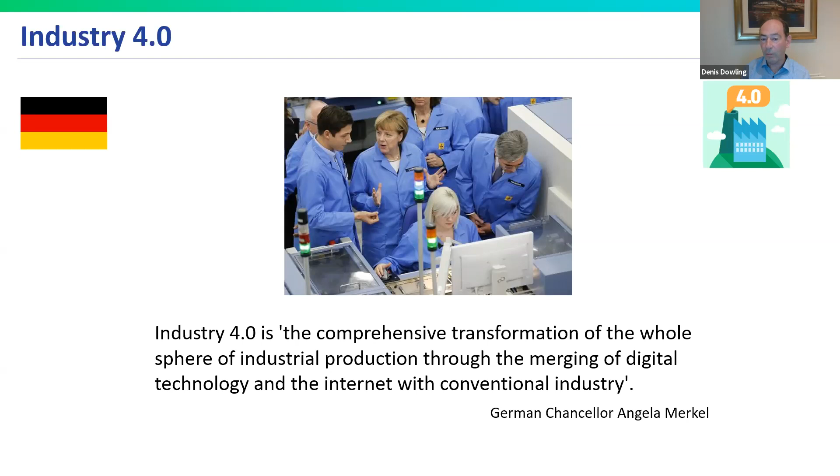So briefly in terms of background, we talk about Industry 4 as the fourth industrial revolution. The first revolution, dating from the late 1700s, was steam. The second was the use of conveyor belts, the first in Cincinnati, with Henry Ford's automobile plant being another example of that second revolution. The third dates from the late 1960s and the use of IT and electronics and the efficiencies from that.

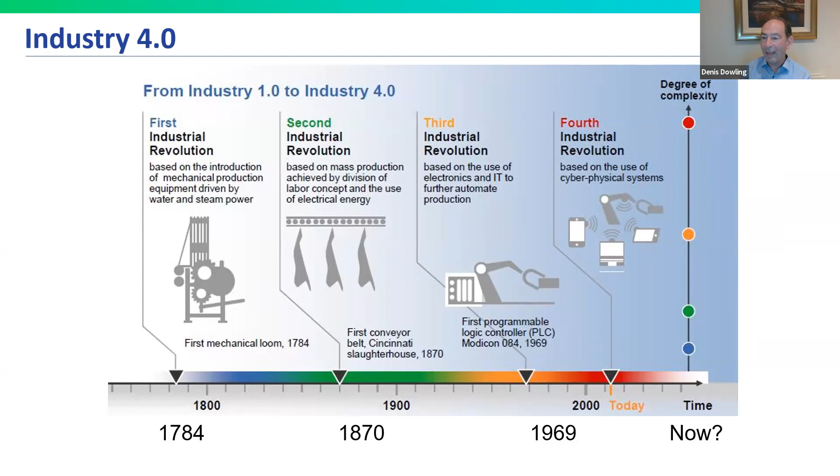And we refer to the fourth revolution as the cyber physical system - this idea of the cyber world, the digital world, combined with the physical world. What I hope to do in this presentation is give some examples of that impact, and you can see on the right hand side the degree of complexity associated with that fourth revolution. So when we refer to it, it's actually the convergence of a number of different technologies.

We look at automation, and I'll talk later about how automation is taking a lot of manual jobs out of manufacturing. You have to look at security aspects, because if information is available in the cloud, how do you keep that secure. We also talk about simulation, which can be a range of things - materials simulation, process simulation, simulation based on the data. And finally, an area where we're very actively involved is additive manufacturing, or 3D printing - the ability to fabricate on-demand components and fabricate complex shapes with ease.

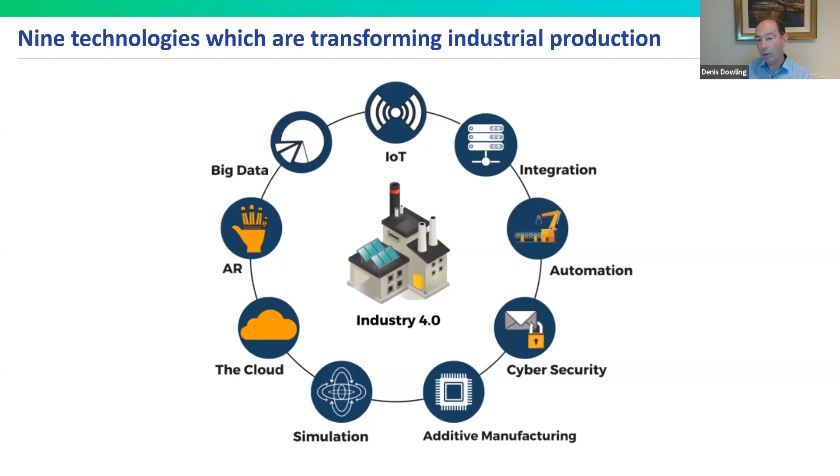All these technologies converge under what's called Industry 4. Industry 4 may not use all of them, it can use some of them, but it's that convergence and the impact they've had that is so important.

It has about 320 kilometers of cables just in those lifts alone. In a typical manufacturing operation, we'd look at the lift, its use, and ongoing maintenance. But through the use of sensors - monitoring the power used, the door opening, the loads in the lift, the sound, temperature - all these are now monitored. So ThyssenKrupp offer a service: not only do they make the lift, but they guarantee the lifts will be up and running with much greater efficiency than conventional lifts, because they offer this service to those who buy it.

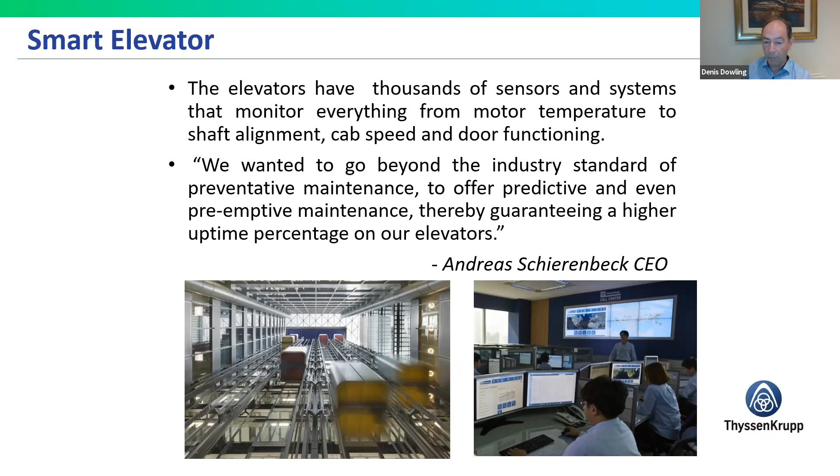So this idea of servitization - you not only make the product, but you supply an innovative service around that product. This is extremely valuable, because one lift going down in this building is of enormous cost in terms of people's time.

Another company using this is Nike, and the information can be downloaded to your device, your mobile phone, with respect to what's going on with the use of the shoe. But not only to that device, it also goes more broadly - for example, that can be relayed back to the factory, the information in terms of the use of the shoes.

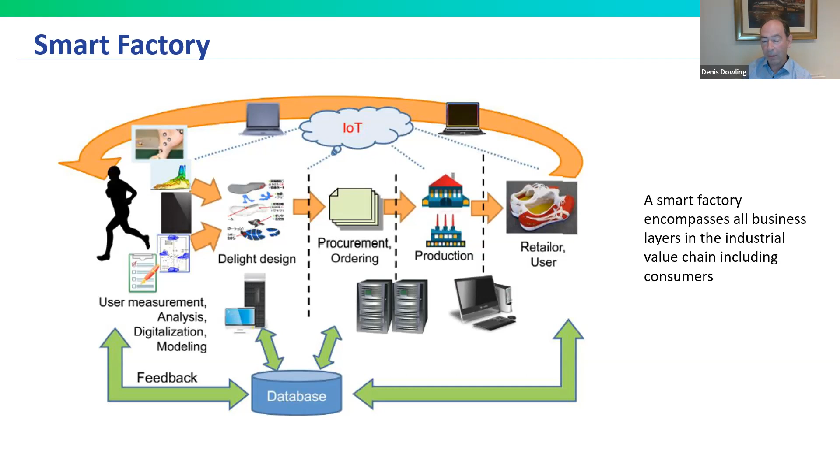Obviously, if the manufacturer finds that their shoes are being used more regularly, it means there will be demand for that particular make. Or if the shoe is sitting on the shelf, not being sold in the shop, it will also see because there's no movement in the shoe. So it can change its supply chain to address that, not only in terms of its manufacturing activities, but also in terms of who it links with in that supply chain. So that's the idea that the sensors are informing what your customer is doing, but it's linked all the way back through procurement to what is happening in the manufacturing plant.

So we can look at this in terms of the Internet of Things in manufacturing, and look at the individual stages. If we look at the manufacturing plant, we can address things like predictive maintenance - we can see when a machine is going to go out of specification. We can look at raw material supply, or where components are within the plant. We can also address it in terms of the global facility - how does one facility compare with the next?

Also in conjunction with the customer site, with respect to how the product is being used. In the case before, it was runners, but here we can look at how that product has been performing - or, for example, with the COVID vaccine, if the temperature has gone above a certain level, that can be monitored and sent back in real time to give a warning not to use it.

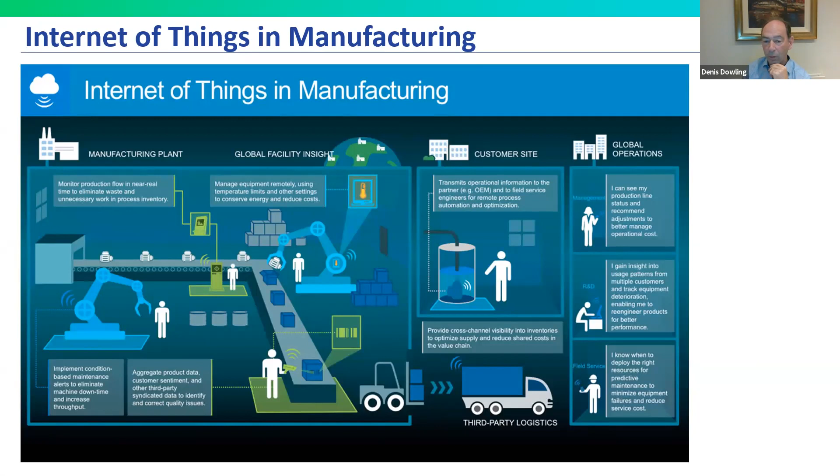But it also will indicate where we need to go going forward, with R&D, with management or procurement - all those aspects supplied through those IoT sensors.

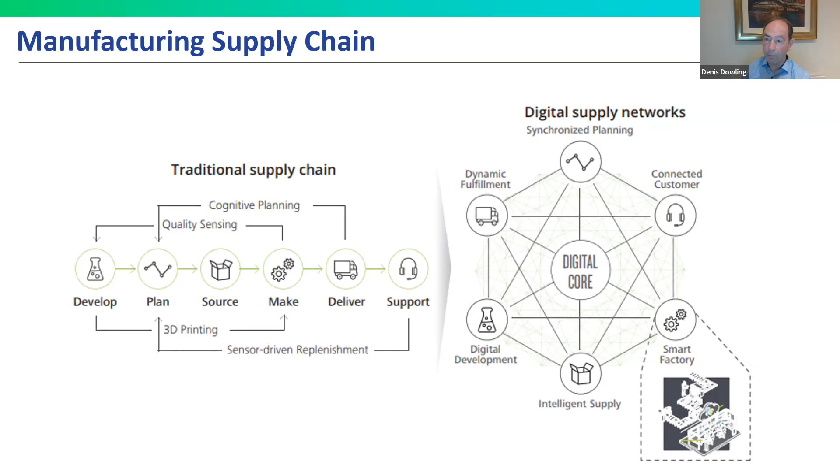So the supply chain has changed from a linear supply chain, where you look at development, sourcing and delivery and wait to see whether it's been sold or not, through to a much more digital supply chain where you get continual feedback - where you can see if product is being sold or not, decide which product lines are being used, and get much more efficient use of the equipment through those digital supply chains.

One aspect of this - not only do you become informed about what's going on with respect to the manufacturing operation, but the actual customer can request changes in the product when they're designing it, and those changes can be implemented during the manufacture of the product.

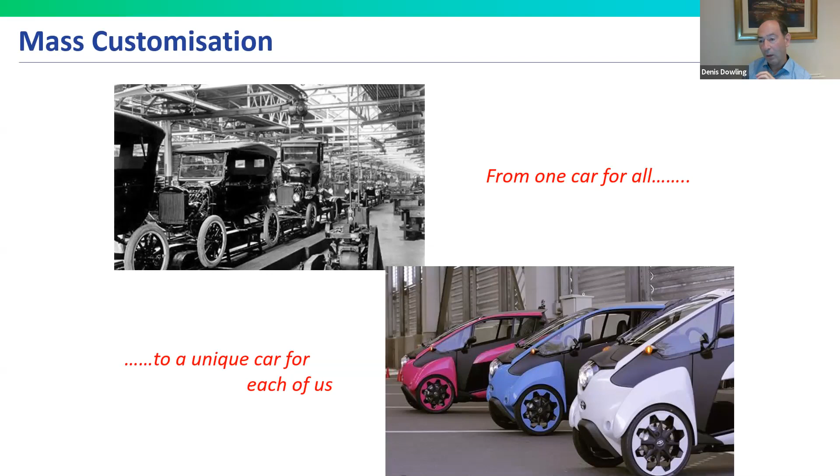So this is the idea of mass customization, or individualization, within certain limits. You move from Henry Ford's famous dictate that you can have any color as long as it's black, through to you can have any color you want as long as it's within these ten ranges. It has come to true fruition.

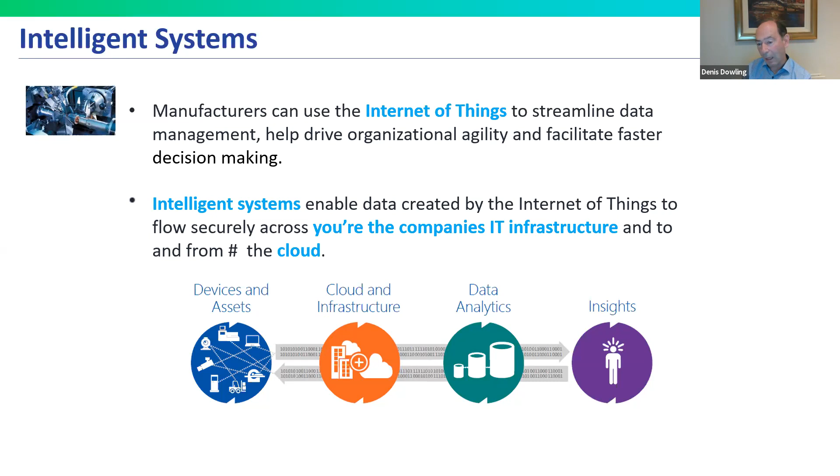Through this Internet of Things, the ability to obtain sensor data and upload it to the cloud, using data analysis to capture information and feed it back, gives us insight. We talk about it as an intelligent system. That's fine for anomaly detection - you can find anomalies in a process and decide what to do. But in many cases that's just one element. You need deeper insight, and modeling of the process or product can help, as long as it's informed by what's actually going on.

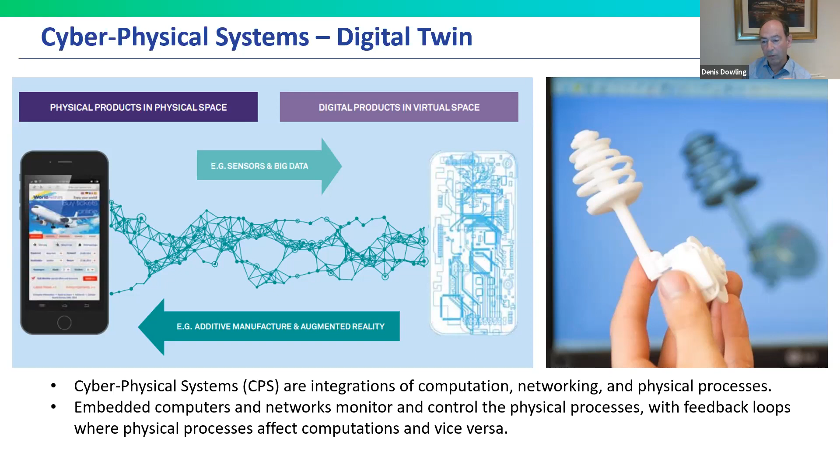When we combine these together, we talk about it in terms of what's called a digital twin. It's a cyber version of the real thing, and you can carry out many experiments on that digital version which would simulate what's happening to the real version. Rather than just a model, what you're doing is informing that digital version with what's happening in real terms from the actual experimental or plant version, so it continually provides information back. The sensors and big data continually inform the digital version, creating process feedback loops.

So how has this been applied? Well, one of the first companies to do it, perhaps not surprising given the cost of turbine engines, has been companies like Rolls-Royce and GE. They have digital twins of their turbines in aircraft, using them for information about how the engine is performing and when it's due for repair. Rolls-Royce has about 13,000 civil aerospace jet engines at any one time in operation.

A lot of their operation activities are controlled from the UK. They monitor what's going on and sell a service to aircraft companies like Boeing in terms of the use of their equipment, providing real-time information about the jet engine, because if the jet is going to go out of service, they need to know before there are passengers on board. They can schedule in and predict what's going to happen, so overall efficiencies are improved enormously through these technologies, particularly around prediction.

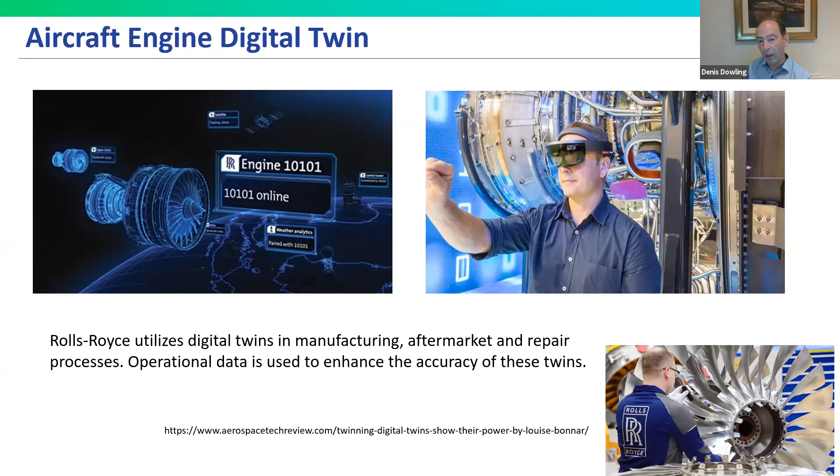But it's not only jet engines. More recently they've also carried out digital twins of the undercarriage. It's every element in terms of the process and the product - you can have a digital twin with respect to that.

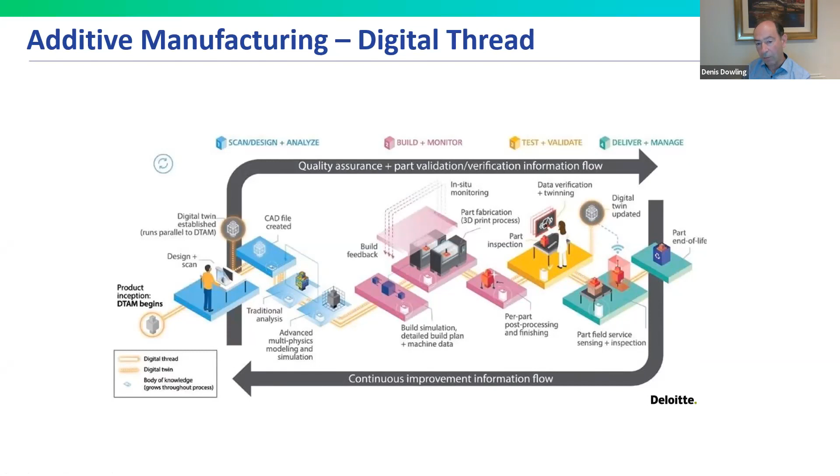In addition to the digital twin, we also talk about a digital thread. I've taken this image from Deloitte of an additive manufacturing process. Right at the center you have the process where you're carrying out the printing. You can have part inspection, as shown here, and the information from that is fed back in terms of the CAD. So you have this link between design, manufacture, inspection, and end use, with continual feedback. This idea of a digital thread linking all aspects of the process is very important, of which a digital twin can be of a specific part, be it the product or process within that.

Now this is much more than simply a single layer where you obtain a defect. You can look at multiple layers and combine defects such that you can see the overall impact with respect to the process.

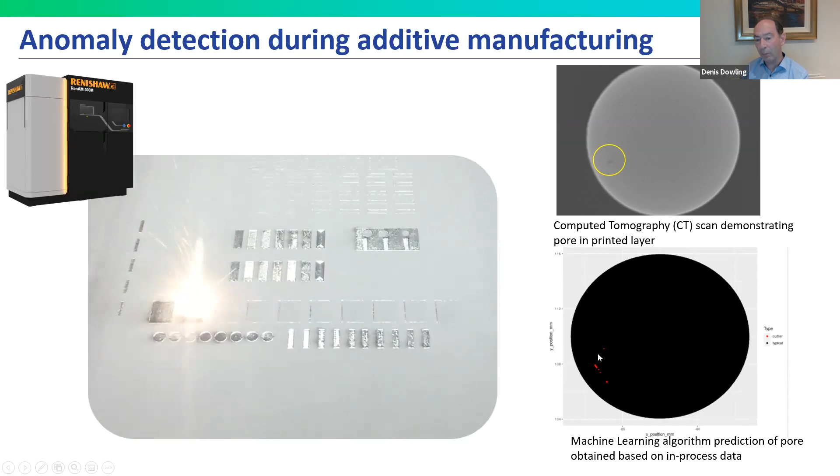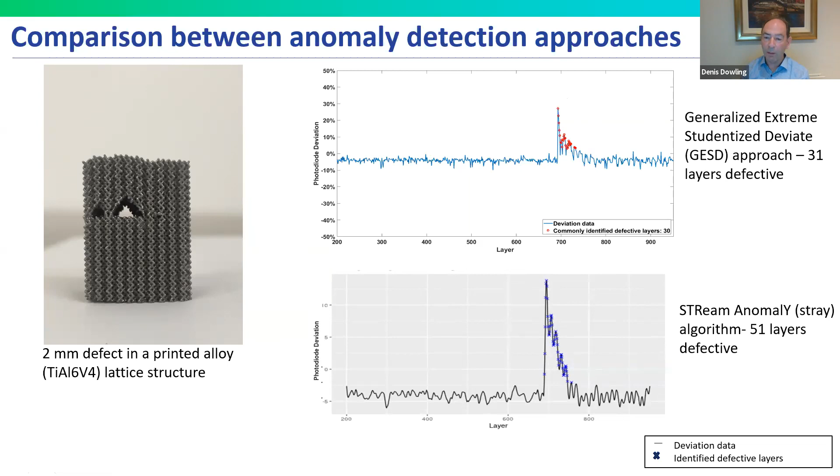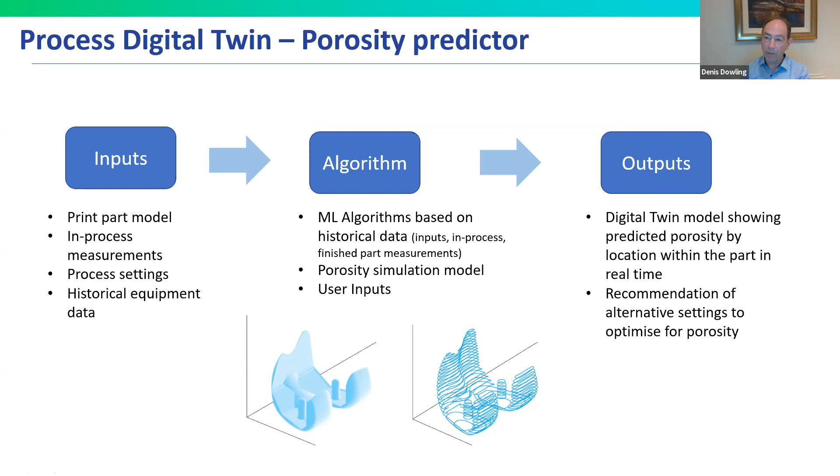Taking this information, along with modeling information, process setting, and historical data from what has gone before, combining it with machine learning, we can use this to help predict a model for defects, which will tell us the recommendation of the level of defects with respect to that structure. Is this catastrophic? Is this something you can alter the process for? And can we go back and tell the operator these are the conditions you need to change the process and conditions? So this is an example of a digital twin developed for looking at processing issues as opposed to product performance issues.

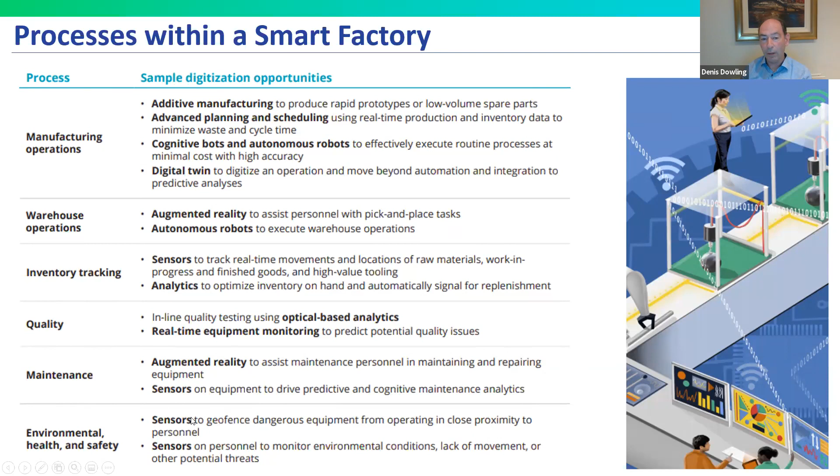Quality inspection, you could see from the work we've been doing, that's clearly an ongoing issue. Predictive maintenance, again, augmented reality is extremely useful there because it can help train and identify where defects are. And finally, the area of environmental health and safety, such that warnings, sensor data can say, look, you have a problem, you're approaching too close to equipment, or there's been a leak, and that information can be relayed directly through IoT to devices.

So to summarize then, in terms of the value drivers behind Industry 4.0, I think you can see the time to market, identifying how to make a product more efficiently, how to look at the robustness of that product, how to play around with the designs and see what it looks like in a simulated version can help time to market. We can also look at how we address different product lines and match supply and demand much more effectively. After sales, we're all used to working on our laptops, and if there's a problem, we can phone in and data is supplied directly to the manufacturer with respect to issues there.

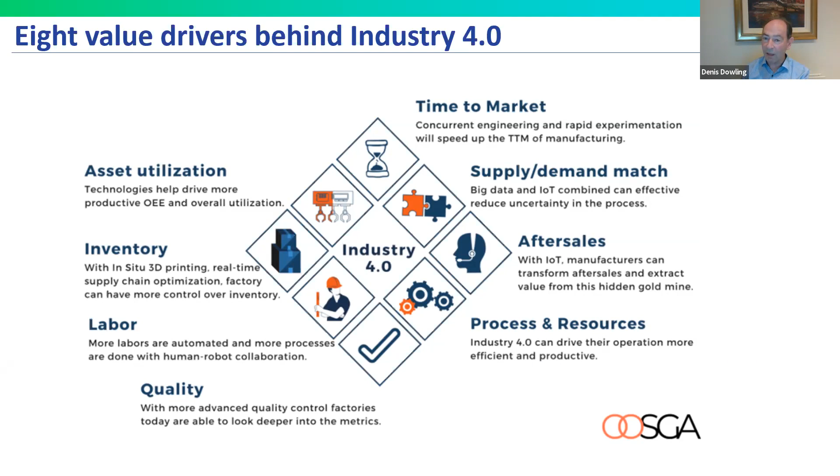So Industry 4.0's impact is much higher efficiencies, much more individualization, more sustainable operations, and overall more profitable, as long as it's done efficiently and it's designed to meet the individual needs of the manufacturer.

I want to move on now to talk about manufacturing employment. It's very much related to Industry 4.0 because, as I've highlighted, the impact of Industry 4.0 is going to be a decline in manufacturing jobs. This is an interesting graph from the United States. It looked at manufacturing employment between 1947 and 2011. And you can see this rapid fall off. They lost about a third of their manufacturing employees in the 10 or 11 years from 2000 to 2011.

Now, that caused a lot of social issues, and you could see it in terms of blaming China for that, but that's only part of it. In a sense, employment declined, but actually productivity continued to rise. So that change was largely due to automation, and the automation of manufacturing had a dramatic impact with respect to jobs. Now, what we're looking at here is a third reduction in an advanced economy between 2000 and 2011.

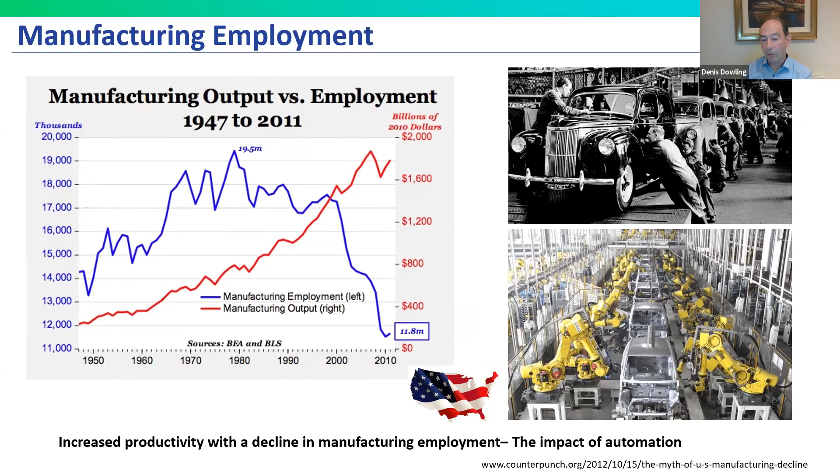If we look at what the impact of automation will be more generally, this is a report by Bain who looked at this area and said, actually, if you look at the period from 2020 onwards, the impact is going to be far greater. This is again in the US, and it's the service sector as opposed to manufacturing sector. To a certain extent, manufacturing has already lost a lot of jobs, and there will be further losses, particularly in manual jobs. But you can see here that the scale of the impact of automation and some of these digital technologies will be quite enormous, particularly over the next decade.

And the impact of that with respect to livelihoods is going to be quite considerable, and the ability to reabsorb workers from that sector and the importance of redeployment and reskilling is going to become increasingly important.

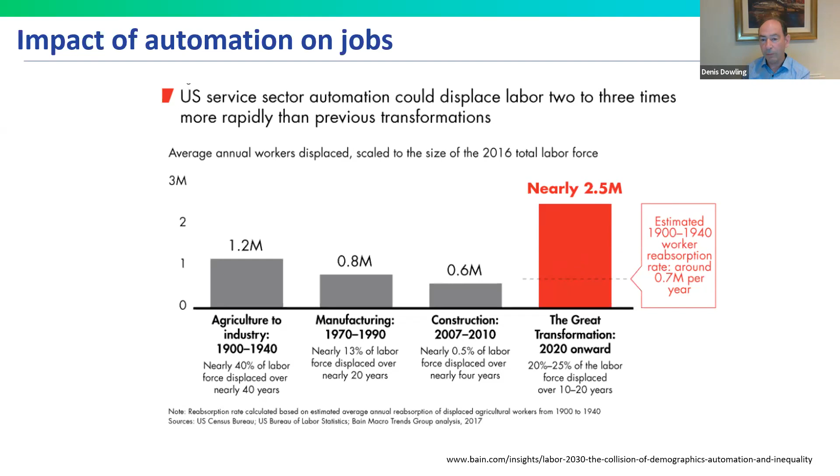Well, what's the situation then with manufacturing? If you look at it in terms of manufacturing, far fewer jobs directly in manufacturing, but far more outside that. So it's been estimated that every job in manufacturing will create between 3 and 15 jobs elsewhere in the economy. So there's a multiplier with respect to manufacturing associated with more innovation, components, education, for example, because of the skill levels. So much more highly skilled jobs and many more jobs elsewhere in the economy.

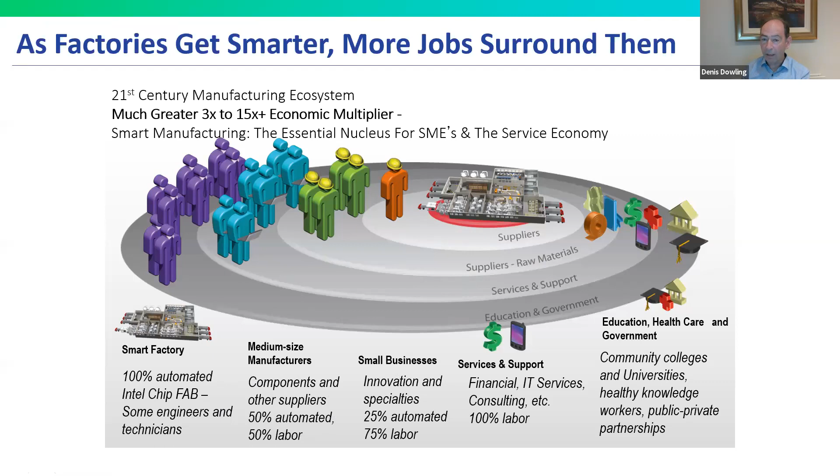And it's because of that there is considerable interest with respect to attracting these high-end manufacturing jobs going forward. Some examples in terms of these new roles are digital skill jobs, which weren't there in the economy previously. There will be growth for those who win that manufacturing employment. There'll be reshoring taking place because the benefits for low-wage economies in terms of low skills, because of the type of manufacturing where it's changing very quickly, those long supply chain issues would become a lot more problematic. And supply chains are also problematic if they're too regionally located, as we saw during the pandemic.

And this change to servitization, this move, as we saw with Rolls-Royce, where you supply the engine, but you also supply a service, and that service can be extremely valuable in terms of the company going forward.

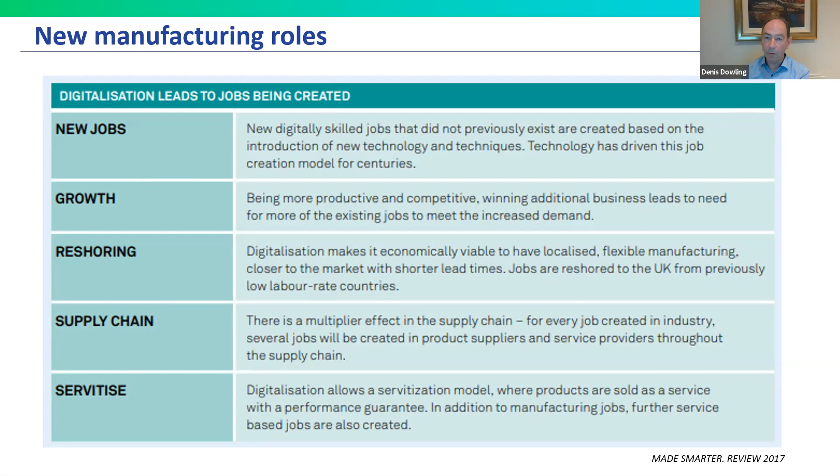So the final part of my presentation is going to talk about, okay, so there are very high value added jobs in manufacturing, but the issue is how to retain and how to grow those. So I just want to briefly talk about what that impact is more generally.

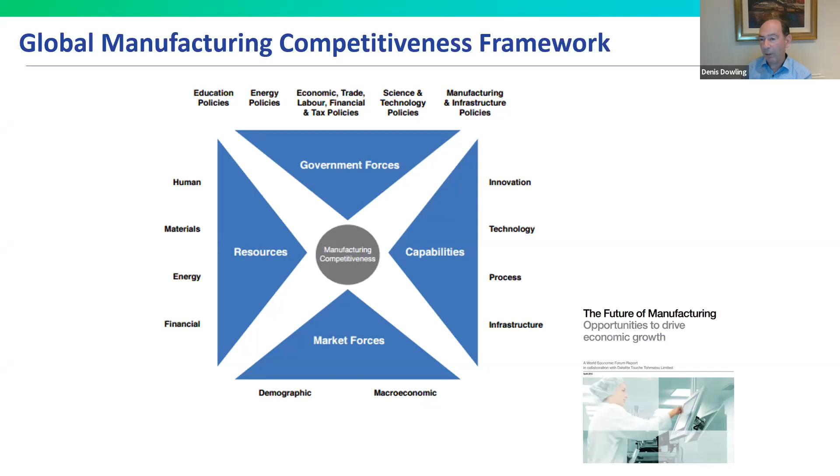To begin with, let's look at the factors influencing manufacturing growth in general. You can see a range of issues. There's resources, availability of power. There's the market forces, close to your market in terms of where you're going to sell. There's the training and capability part, and then there's the government. For example, Ireland has benefited enormously from low corporate tax in terms of companies coming in, but that has been slowly eroded because other people are matching that, because they see the value added with respect particularly to those manufacturing jobs. So what's happened?

Well, an example is the Catapult Centres in the UK. There's very significant investment there with respect to it. And very recently, the UK announced a new city deal Catapult. Belfast will gain from that, for example, with respect to the expansion of these Catapult Centres. These are technology centres closely related to industry. And there's been a number of studies showing that the return on investment in terms of these centres is quite considerable with respect to jobs created, employment and higher productivity.

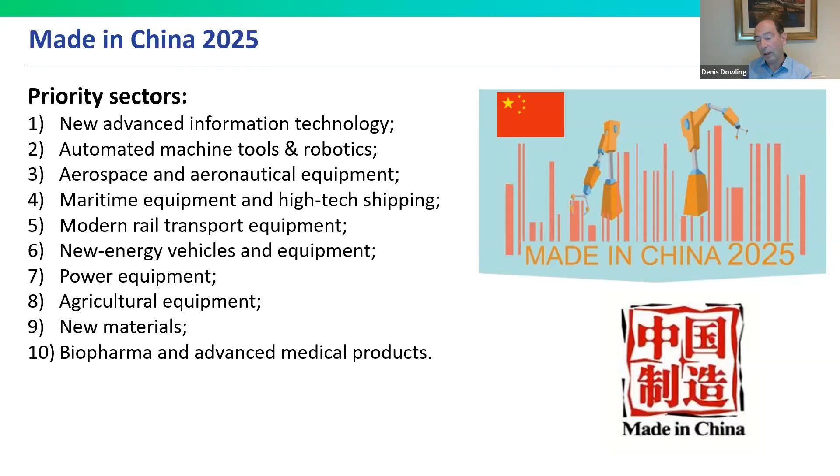In China, they have their Made in China 2025 program. They've highlighted 10 areas as shown here, and amongst them is advanced medical products, which is obviously one for which Ireland is competing directly. But you can see some of the other areas that are highlighted here. So China is investing very large amounts in developing and moving up the value added with respect to its manufacturing, because the costs in China in terms of employment are beginning, on the East Coast of China, to certainly match, if not exceed, Ireland's. And that's an issue for them going forward. They have to increase their value added.

So, in fact, looking at the Made in China 2025, the original budget for that was 300 billion. And as a result of COVID-19, they recently announced they're increasing that to 1,400 billion. So an absolutely enormous investment in terms of high-tech industries. Part of that is a reaction to some reshoring associated with that regional issue with respect to supply chains.

The UK, in addition to the catapult centres, has recently announced their Advanced Research Projects Agency, ARPA. It's not unlike the defense DARPA in the USA, but very much focused on innovation, close to market activities, and looking at those aspects closer to market rather than blue sky research.

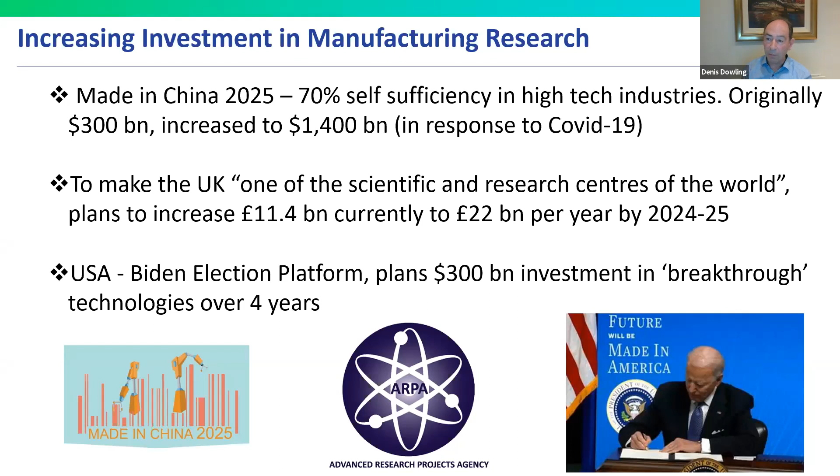Finally, in the United States, you can see Biden here: the future will be made in America. That focus on manufacturing locally - as part of his program for government, he talked about 300 billion investment in breakthrough technologies over 4 years. So this is a very large investment internationally in some of those bigger players, which Ireland can't compete with due to scale.

But in terms of our own sectors, it's interesting - The Economist had an article about Chinese investment, and where Ireland is located, at the high tech, high value added manufacturing, is exactly the space that China is targeting. It's just a reflection going forward of the competition into this space because of the wealth that it generates for a country.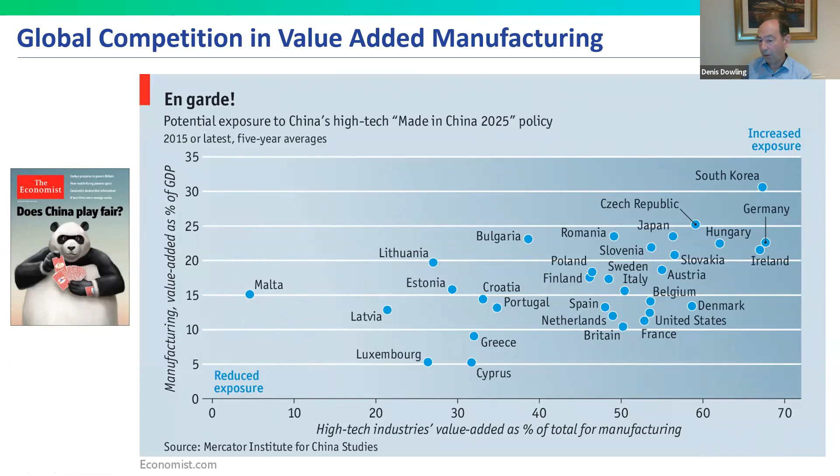So how does Ireland compete then? Well, unfortunately, our level of expenditure in terms of R&D is relatively low compared with our competitor countries. If you take the value between 2014 and 2015, we dropped from about 1.5% to about 1% of our GDP. Now part of that is because of changes in tax, and our GDP went up enormously.

But in terms of GNP, our actual valuation of the economy, we're spending around 1.5%, equivalent to other countries, but the average within the EU is 2% of GDP. If you look at countries like the Nordic countries, Germany, it's over 3% of GDP. So we're significantly below the level of expenditure in terms of R&D where we need to be to compete even at a level playing field.

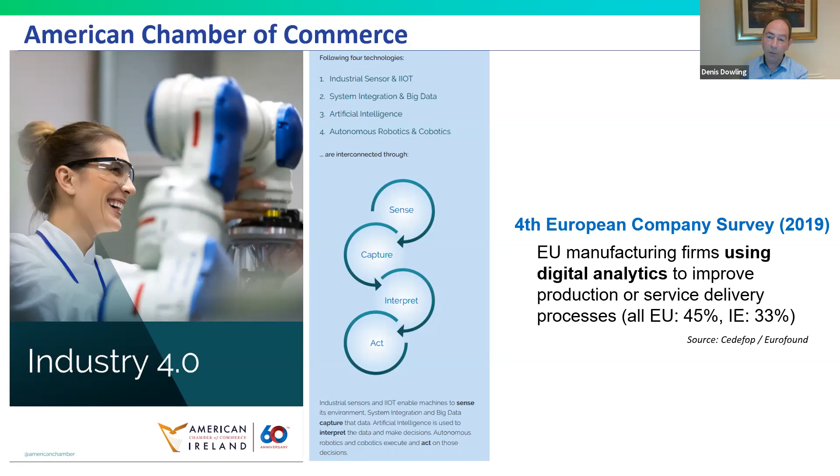The idea was to sense what's going on, capture that data, interpret it, and then act on it. It's just one example of the need for investment, where we're seeing other countries putting in infrastructure to help link between what companies need and the education system.

So finally, in terms of concluding this section - Industry 4 has enormous potential in terms of efficiencies, reduced downtime and productivity, new activities combining service and traditional manufacturing activities, this servitization role. It will certainly reduce jobs in manufacturing, however, there will be higher value added jobs, and high level of competition for manufacturing employment.

Ireland has done very well to date, particularly due to its R&D investment and its combination of local skills combined with foreign direct investment. Some of those foreign direct investment companies are world leaders in terms of Industry 4, but there's also a large chunk of the economy that isn't digitalizing, as I indicated in the last slide. And that's going to affect our competitiveness going forward.

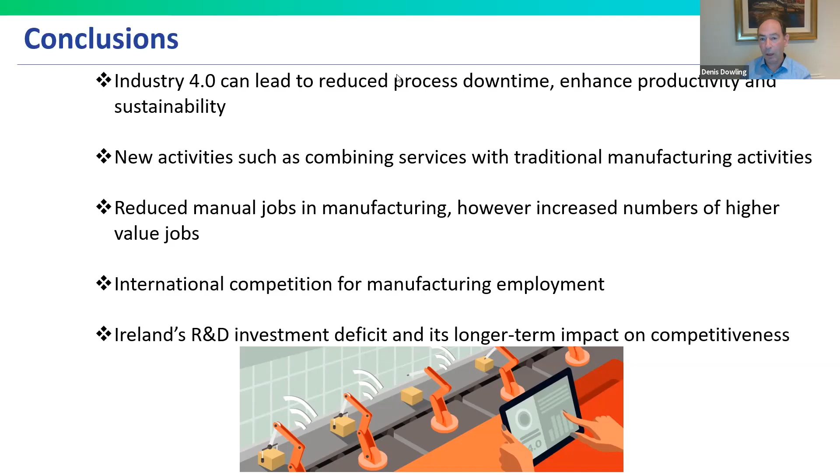So that provides a summary in terms of this element of the overview. I'm going to hand over now to Colin, who's going to talk about some of the work that's ongoing.